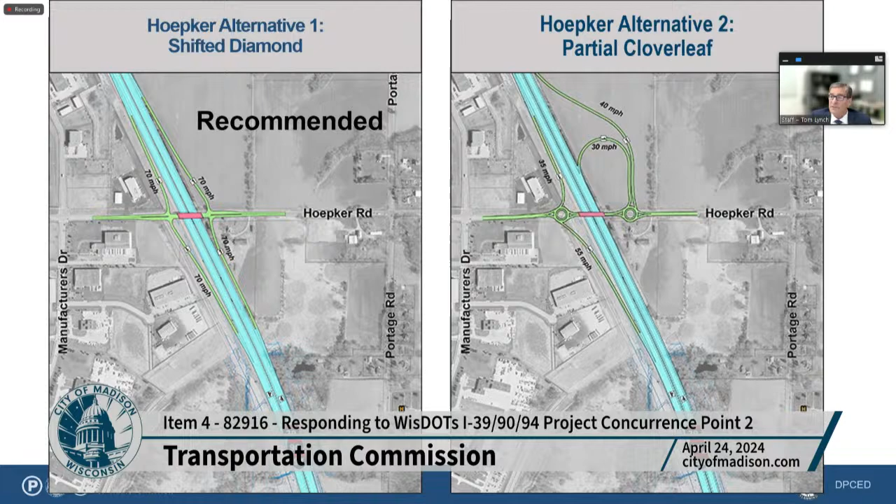As far as the benefits, this improves interstate access to area employers and regional medical facilities. It serves the planned residential growth northeast of the interchange, potentially facilitates further development on sites within the American Center. The American Center was initially kind of developed as a suburban business office park, but recently many, if not most, of the property owners there have decided to densify it and make it a little bit more of a traditional employment area with more streets and taller buildings and less rolling grass, and this would help facilitate that.

It does increase traffic on Hoepker Road and may need improvements to accommodate increased traffic. They have done traffic modeling, and the traffic impacts to Portage Road are somewhat limited. West of the interstate, the development potential brought on from this interchange is somewhat limited due to airport height restrictions. Adopted city plans do not currently consider a Hoepker interchange, but they could be revised.

I just also want to provide a note that I think Brian Grady is here too. Brian, maybe you could turn your camera on so that if there's questions, or if I don't fully explain the land use component to a good satisfaction, feel free to jump in. Okay.

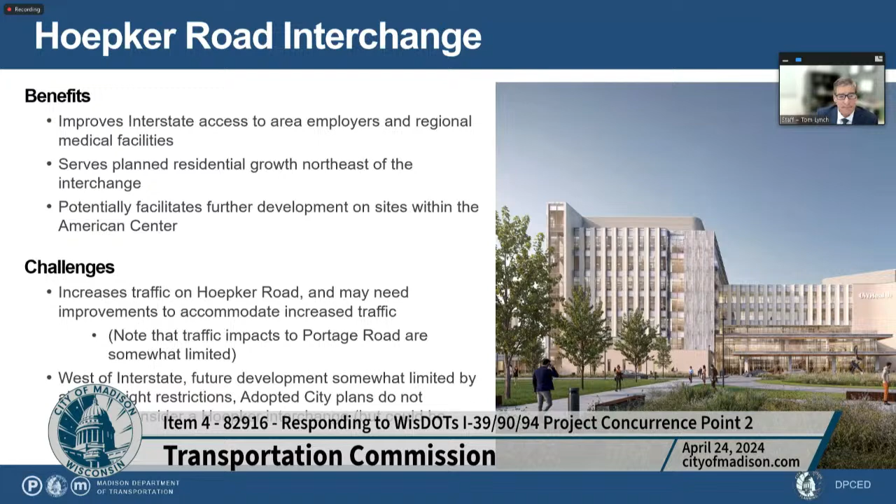This is perhaps the Hoepker interchange impact or benefit area. I think there is some desire that if this was installed and the American Center benefits, that perhaps the American Center could help participate in the local cost share associated with it.

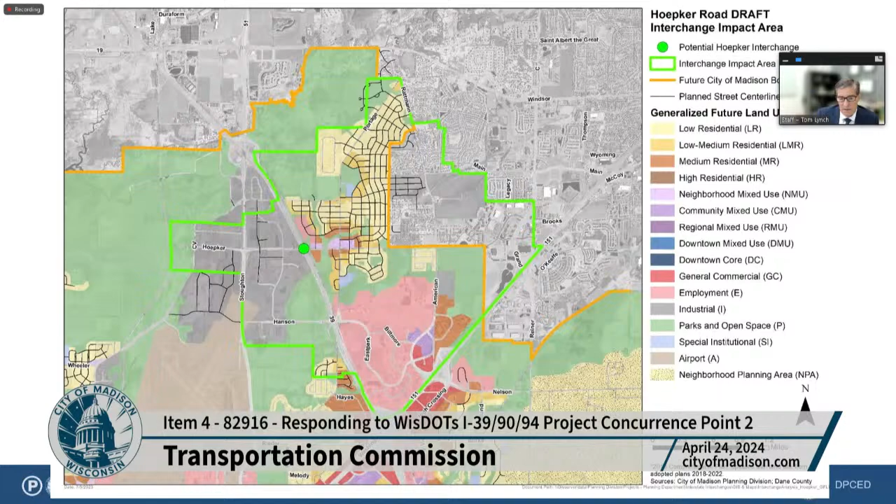These are the types of existing development that this interchange would serve, so it's pretty dense. My wife was a patient at that hospital a couple of years ago, and I was surprised at the size and the breadth of area that the hospital serves.

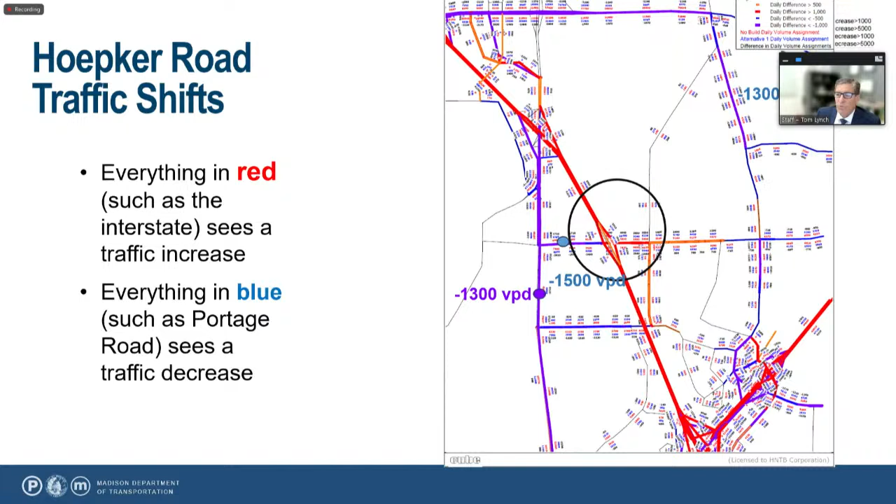These are the traffic changes that would shift. We could get down to the detail, but in reality, roads you see in blue are seeing a reduction in traffic, and roads you see in red are receiving an increase in traffic.

With this interchange, there'd be more traffic on 39, 90, 94. But Highway 51 and some of the local roads you see in blue would see a reduction in traffic. I'll note that this portion of Portage Road, from Hoepker Road down to Hanson Road, would see a decrease in traffic, yet there's almost no traffic change in Portage Road south of Hanson Road.

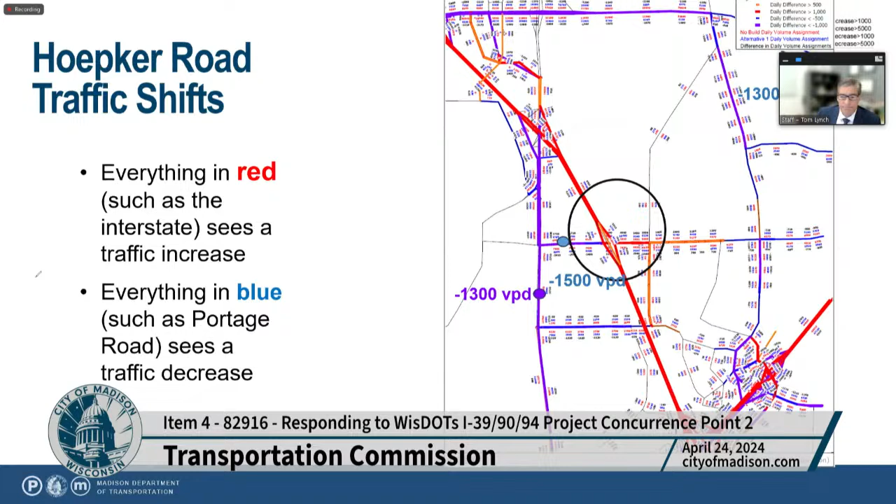These are assignments we recently received from WisDOT's consultants. You can see that Hoepker Road, west of I-39/90, there's a reduction of about 1,500 cars. East, there's an addition of about 8,000 or 9,000 cars.

Portage Road north of the Hoepker interchange, 700. Portage Road south of the Hoepker interchange, 2,600. These are quite modest, not significant traffic changes. I'm also using an old slide, so the statement here that it's no longer the preferred alternative is wrong - alternative 1 is the preferred alternative, and it does include the Hoepker interchange, so please ignore that statement below. I'll correct it in the slideshow.

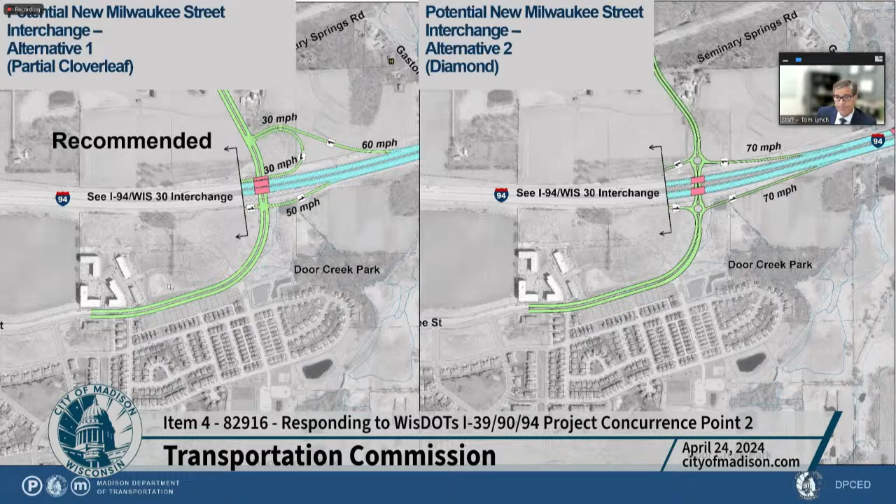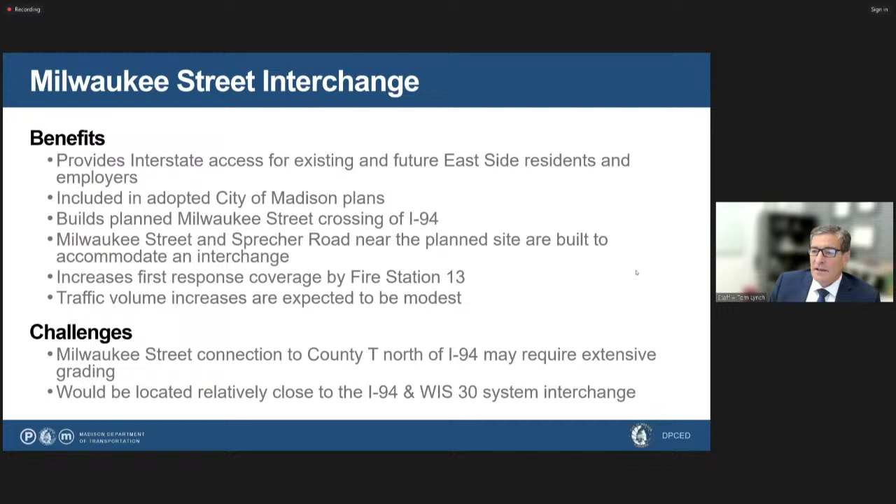I'm going to, if Brian you're here - these are slides I think you state with more passion than I do. Brian, do you want to give these slides right now? I'm not sure I see Brian. Is Brian on? He's not on, so I'll try to state these with the same passion some of our planning staff would. Tom, did you need Ariana to send him an invitation? No, I've sent him an invitation. Oh okay, yeah, so that's fine.

The benefits: it provides interstate access for existing and future East Side residents and employers. It's included in the adopted City of Madison plans. It builds the planned Milwaukee Street crossing of I-94, which has been planned for so long the bridges are already there. The Milwaukee Street and Sprecher Road streets near the planned site are built to accommodate an interchange. The Madison Fire Department is interested because it increases first response coverage by Fire Station 13. Traffic volume increases are expected to be modest. The Milwaukee Street connection to County T north of I-94 may require extensive grading - in some ways that's WisDOT's problem more than ours, since it's their project.

It would be located relatively close to the I-94 and Highway 30 system interchange. Again, WisDOT is willing to allow that to occur.

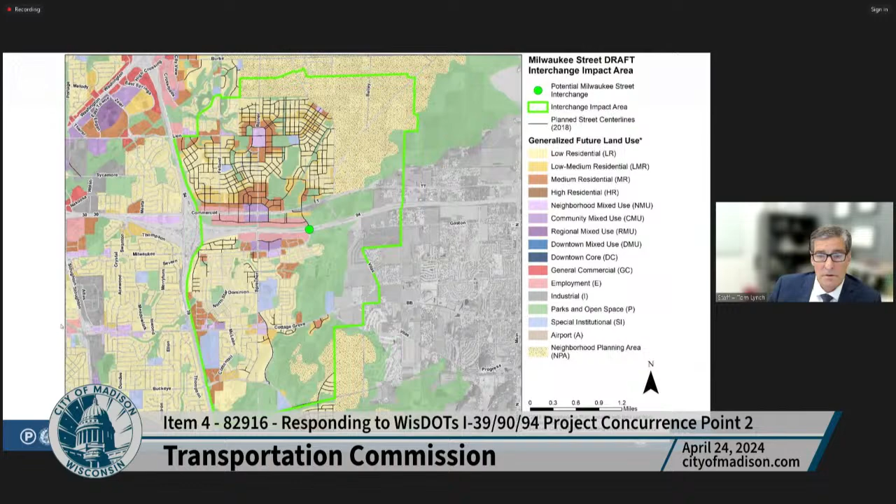There we go. The interchange is shown in the neighborhood development plan from 1998, last amended in 2012. So actually it's been in our plan for 25 years now. It's in our comp plan.

The interchange study recommended by Common Council in 2017 said that the city supports the concept of an interchange at I-94, subject to additional study to determine the impacts of the project on the city, the environment, and planned city growth areas. An interchange would help implement land use and transportation recommendations in the Northeast Neighborhoods Development Plan and the Sprecher Neighborhood Development Plan.

This is the vision that was shown, I think, in the Sprecher plan. City planning says that basically this area could support the density shown in the pictures to the right—one is over by Arbor Gate, one is by City Center West. One might also look at Cottage Grove Road—

not Cottage Grove Road, but if you go to Cottage Grove at the highway interchange, you notice there's a fair amount of employment density developing there, and Madison can't really compete with that. I think there's a feeling that we would be as attractive for employers if we had interstate access like Highway N does.

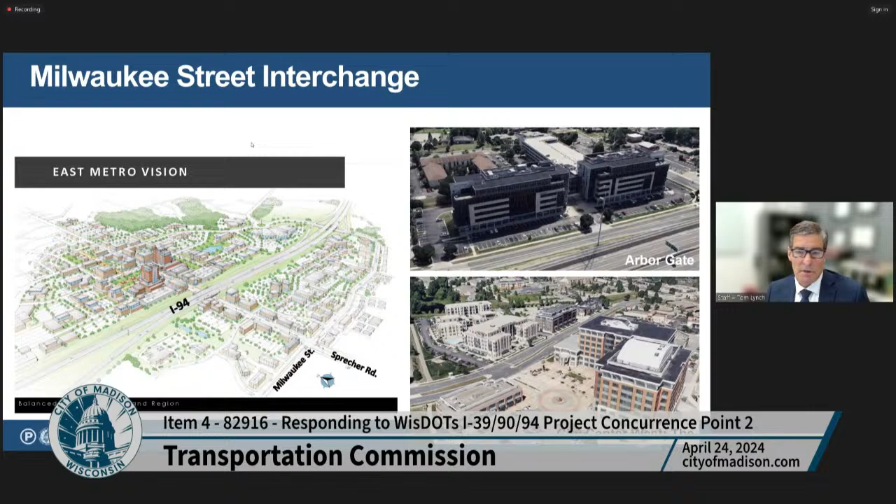So the traffic effects of the interchange are somewhat modest.

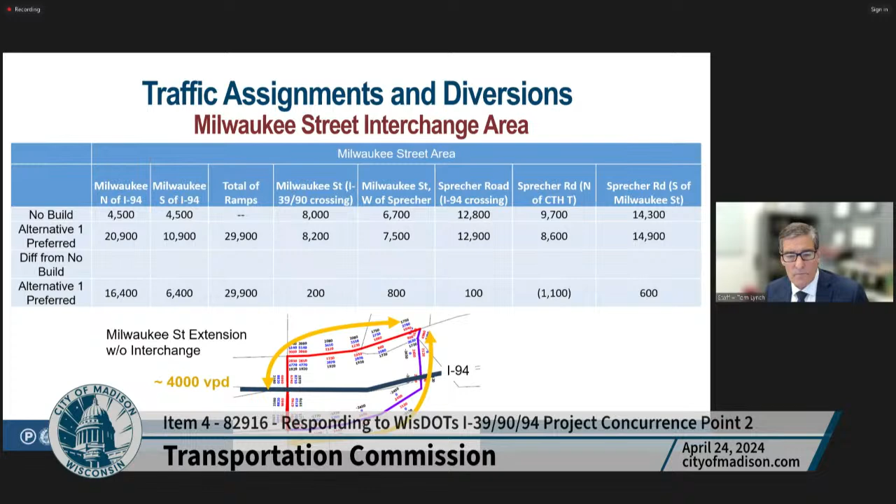First, I want to address the extension of Milwaukee Street to County T without an interchange. If we look at the bottom here, in the traffic model, extending Milwaukee Street to County T would shift about 4,000 vehicles per day that currently use Sprecher and County T onto Milwaukee Street. So it would shift traffic, but it doesn't really affect Milwaukee Street west of Sprecher, and doesn't really affect Sprecher south of Milwaukee Street.

Right now we have the housing development—I think it's the Meadows, right here, you know that area. It would be fine; it might even be advantageous to introduce a little more traffic there.

Here is the difference in traffic that would occur if an interchange were placed there. This assumes the extension to Milwaukee Street already occurs. You can see all of these traffic volumes on Milwaukee Street—differences of 200 cars a day, 800 cars a day, 100 cars a day.

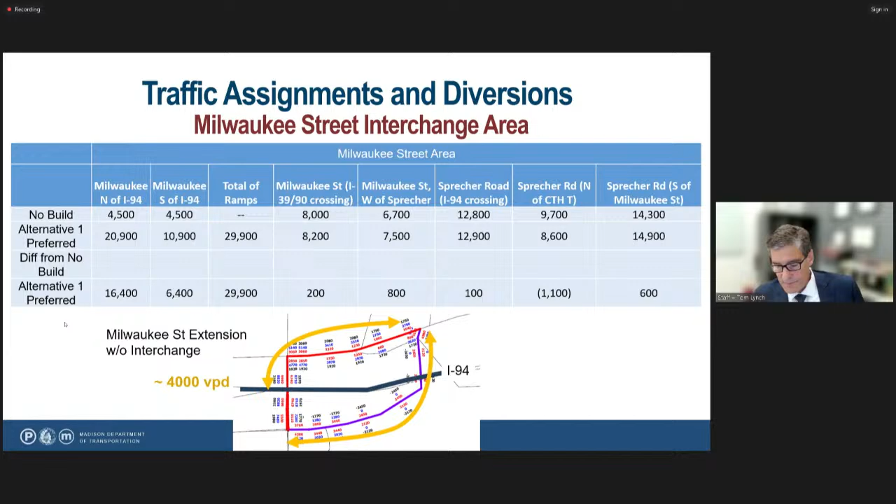Now let's look at the Highway 151 interchange. This is the current interchange—a system interchange. In its day, this was the height of modernity, right? Cloverleafs are less desirable now because of some of the weaving movements that occur between the on-ramp and off-ramp.

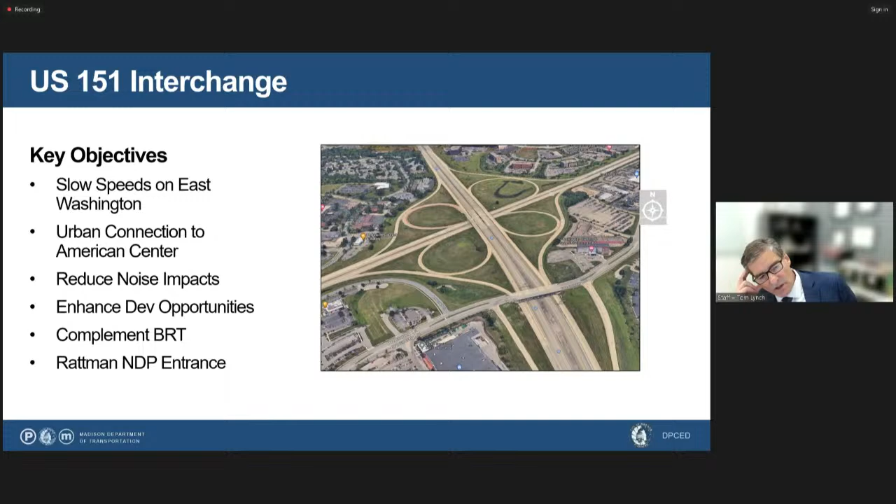For this, some of the city's key objectives would be to slow speeds on East Washington, provide an urban connection to the American Center, reduce noise impacts, enhance development opportunities, and complement BRT—and perhaps change the entrance to the American Center to be more like what's in the Rattman neighborhood development plan.

I think this just helps provide a little bit of context of what's there. You can see that this is East Towne, right? And this is Home Depot.

To our upper left, there's a lot of jobs, right? And it's very difficult to get to those jobs via a bicycle. And it's very difficult to get those jobs if you are a driver that doesn't like to use highways, right? So if we could address some of those deficiencies with this project, we would be for that.

We also would like to slow speeds on East Washington Avenue. In 2021, we had 5 pedestrian and bike deaths on East Washington, which is amazing, right? It's unacceptable. If you look, this is a picture right from Street View, and you can see East Washington in this area has a 55-mile-an-hour speed limit. If you are a pedestrian and you get hit by a car traveling 55 miles an hour, you will die, right? So we would rather see an interchange that supports a lower speed East Washington Avenue.

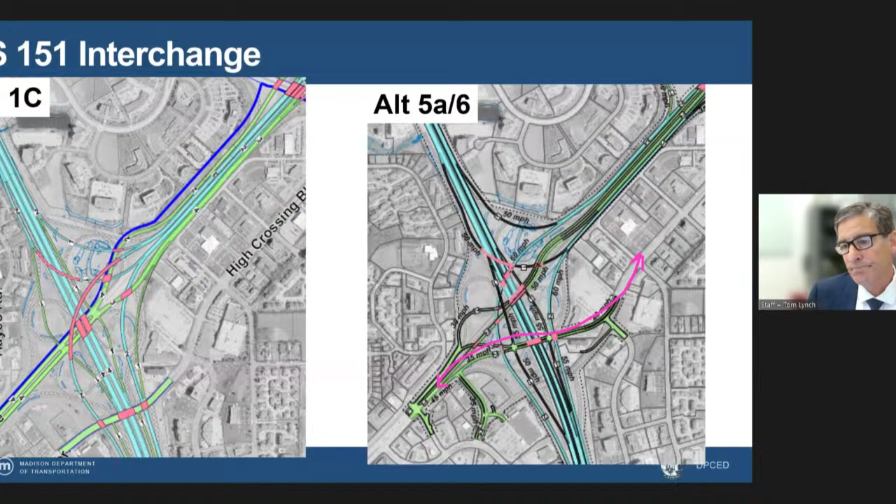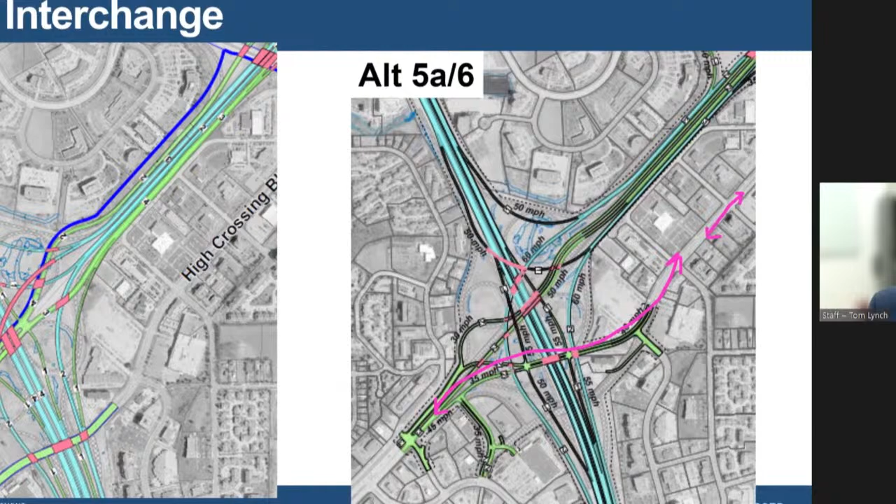We had hoped that perhaps we could route East Washington onto High Crossing, right? And then all of a sudden we have an urban entrance into our city, right, that doesn't go through this. That experienced some problems. The City of Sun Prairie wasn't necessarily in favor of that. And it diverted quite a bit of traffic to Highway 30 and created problems.

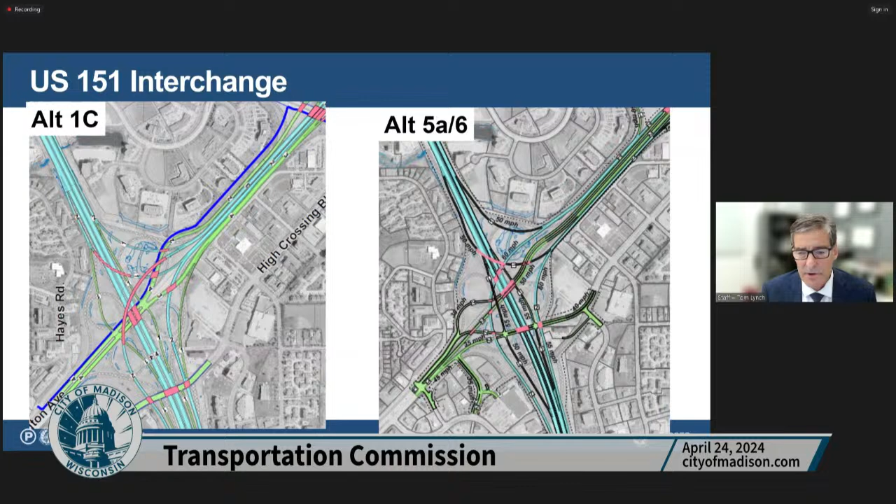It was kind of like a whack-a-mole problem. About 30% of the traffic that was going to be on East Washington went to Highway 30, and then they felt like they had to do improvements to Highway 30. They kind of modified alternative 5A and 6 to the point where we feel like it's not the best alternative anymore. There's too many free-flowing ramps, and it doesn't really slow speeds.

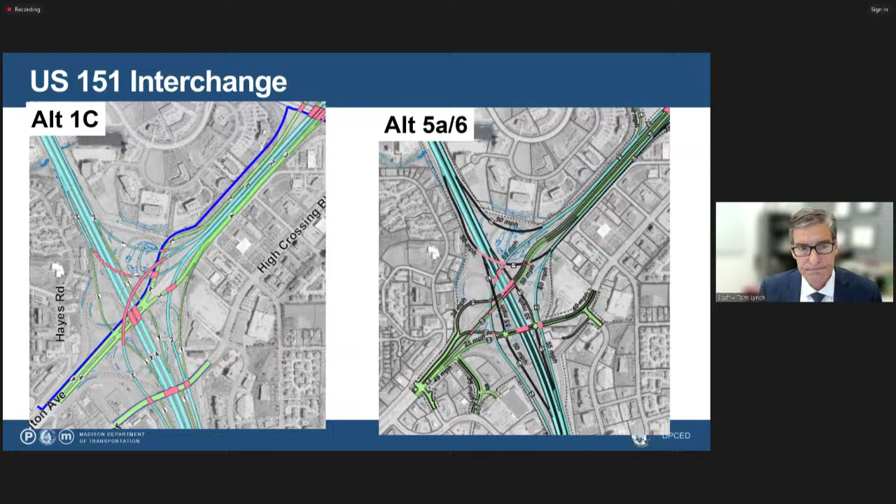So now city staff support alternative 1C. I think I have a slide where I'll go through the components of 1C a little bit better. Let me go down. Yeah, this is it.

We no longer support this. You can see it has, there's no signals to slow traffic. The free flow ramps have no logical bike connections. For instance, these types of situations are poor.

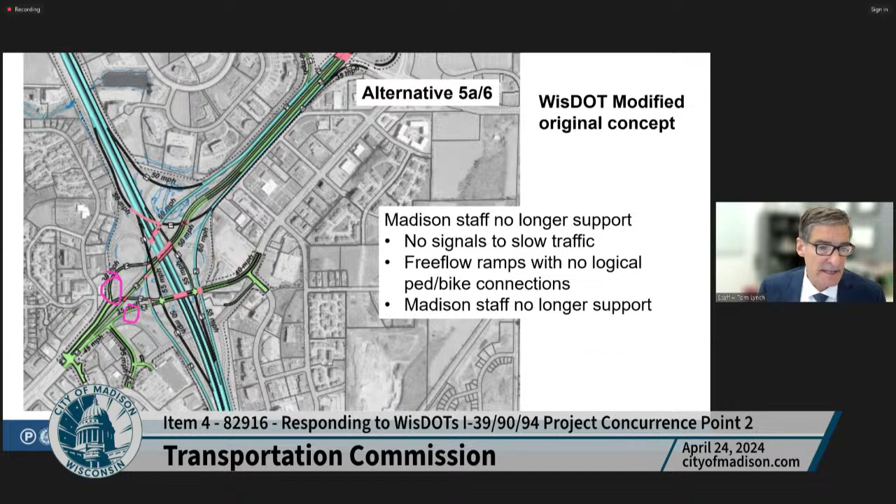So with that being said, they have recommended this. We prefer this to anything they've done. While it is a directional interchange, there are some good things that we like about it. Notice that traffic that comes in from Sun Prairie and/or gets off the interstate to come into Madison has to go through 2 signal-controlled intersections. So instead of having free flowing ramps that promote speeds of 40 miles an hour or higher, cars will have to go through signals, which will logically make them travel at a slower pace.

As far as bike accommodations, we would like a better connection for bikes to not only the American Center, but also to that path that is on the southeast side of Highway 151 between Madison and Sun Prairie. So what they've done is they've created an off-street bike and pedestrian path, shown in blue. Whereas now there's no way, if you're at East Towne Mall, you can take a bike and really get to the American Center, unless I guess High Crossing might be something, but here there will actually be a path that goes through the interchange and takes you right to the American Center. And then if you go through this interchange right here, it'll connect with the existing path that goes to Sun Prairie.

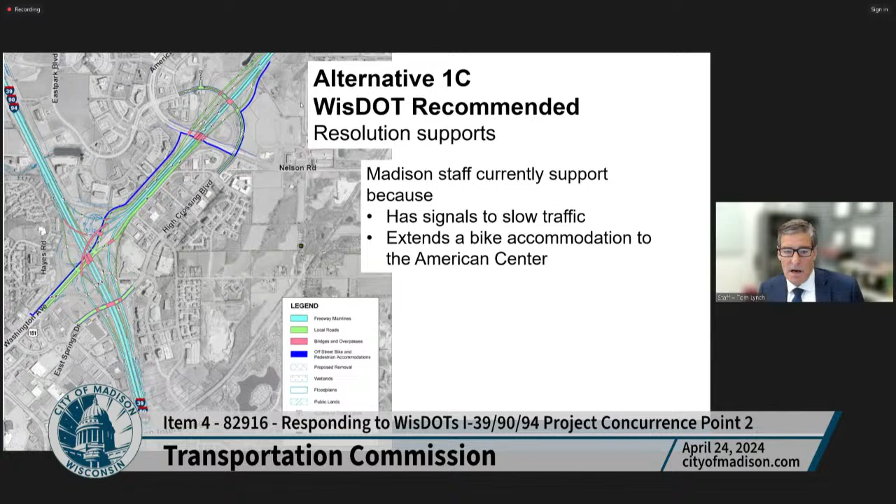As far as the Highway 30 interchange, I think they want to reconfigure it so that there are fewer left exits. The things that you see that are hatched, gray and hatched, that's the existing interchange, and what you see in blue is the new interchange. The new interchange meets their standards, and it essentially fits inside of the footprint that they have now. So I guess we don't have strong opinions regarding this. It's an expensive interchange, but this is their budget, not so much our budget, right?

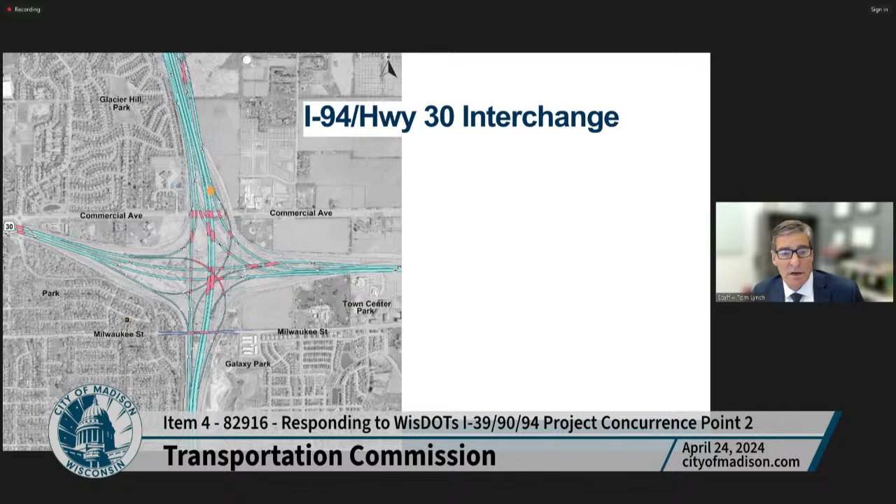Things that we have made an opinion on—again, this is their project, but you can see the modernization of the existing travel lanes, and this is a little bit of a misnomer in that in the section of I-94 between the Badger interchange and 151, there's actually another lane right here. So basically the existing situation is an 8-lane freeway.

We knew that they would want to expand it, so we were advocating for a managed lane that could be treated like the Beltline flex lane. That would be a capacity expansion when they needed it. They have said that they need CD roads, collector distributor roads. So basically what that would do is expand it from 8 lanes to 12 lanes.

Their actual full-on recommendation is they'd like to expand it and put in the CD roads, 12 lanes. In the resolution, we've said that we don't concur with the capacity expansion and that we discourage the use of CD roads. So I guess we have to recognize that this is not our road, but this part of the preferred alternative, we're saying we're not on board with.

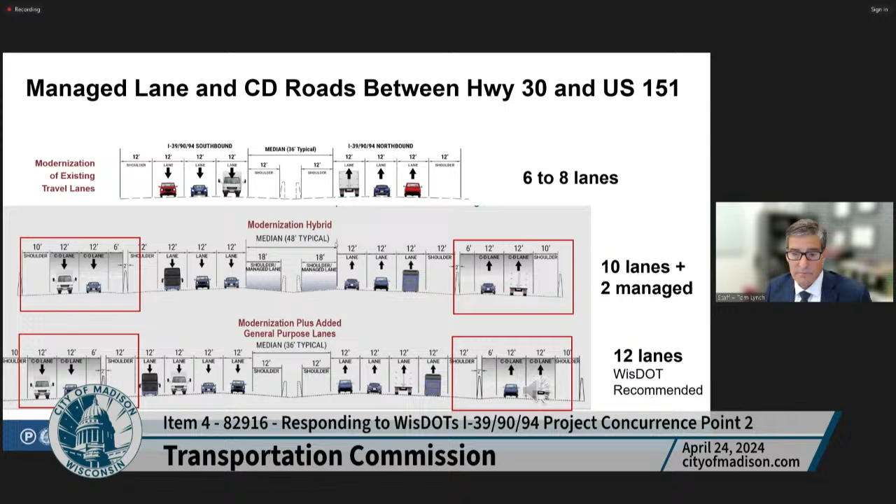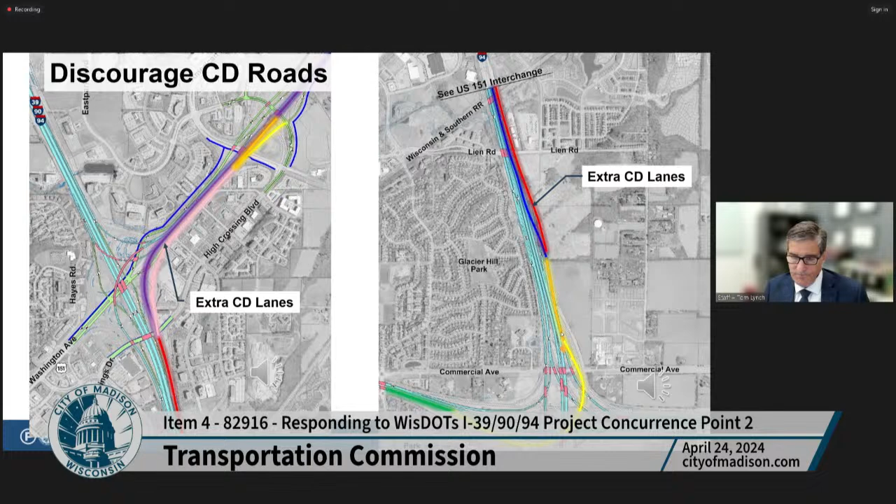This is an example of where the collector distributor roads would be. In the northbound section, you can see how they have a CD road here. What's in purple would be a CD road that goes to Sun Prairie. What's in pink would be a CD road that goes to the American Center. It peels off the main line here in the red. If we look to the right at the Badger interchange, the entrance from Highway 30 goes to a CD road that's in blue. If you want to go on I-94 to the north, you take the blue. But if you want to go to Sun Prairie to the east, you take the red.

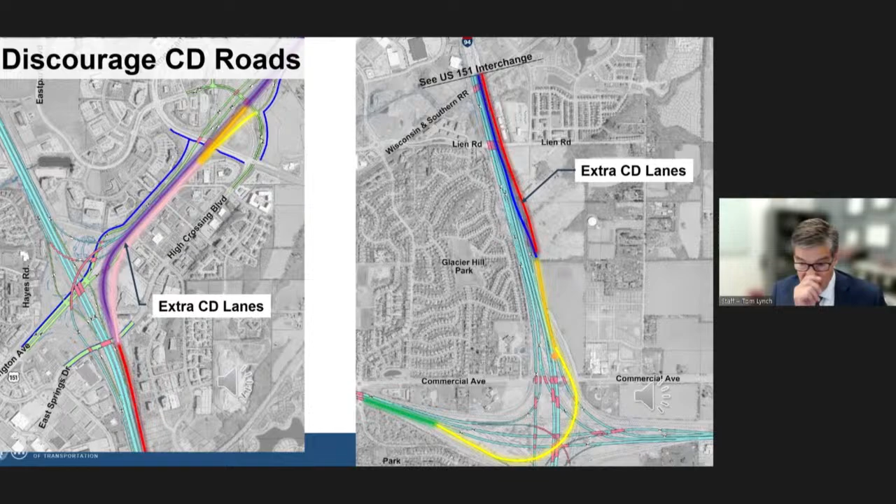Wisconsin DOT and their traffic modeling will say that these are necessary. I'm just going to acknowledge that if you drive this, there are backups. The Highway 30 to 151 connection - if you go in the morning, there are backups and traffic is going quite slowly. But it does add pavement capacity.

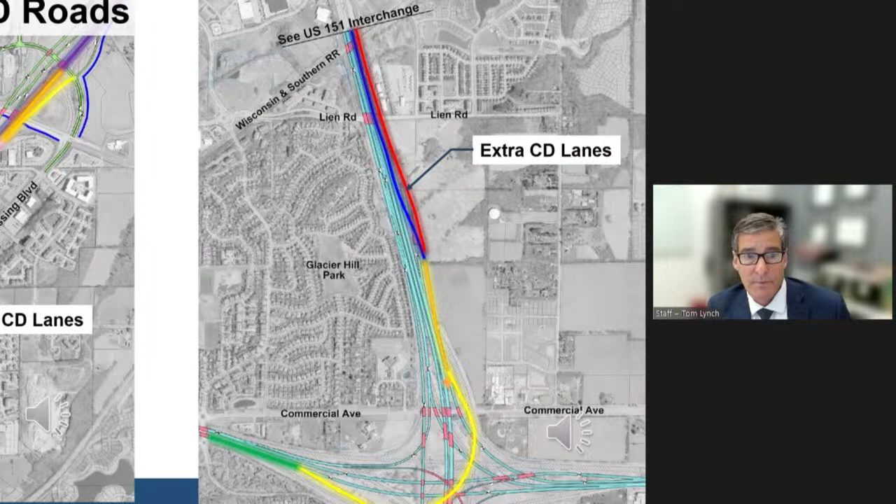This is an example of some of what the CD roads have. Again, the resolution says that we discourage this, but this is right between the Badger interchange and 151. Here you can see this is a basket weave right on the east side, and then on the west side there's just a traditional CD road.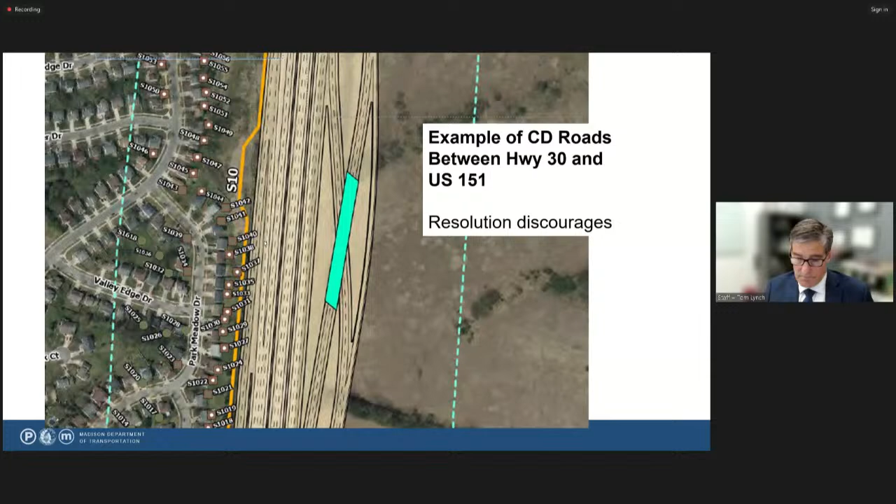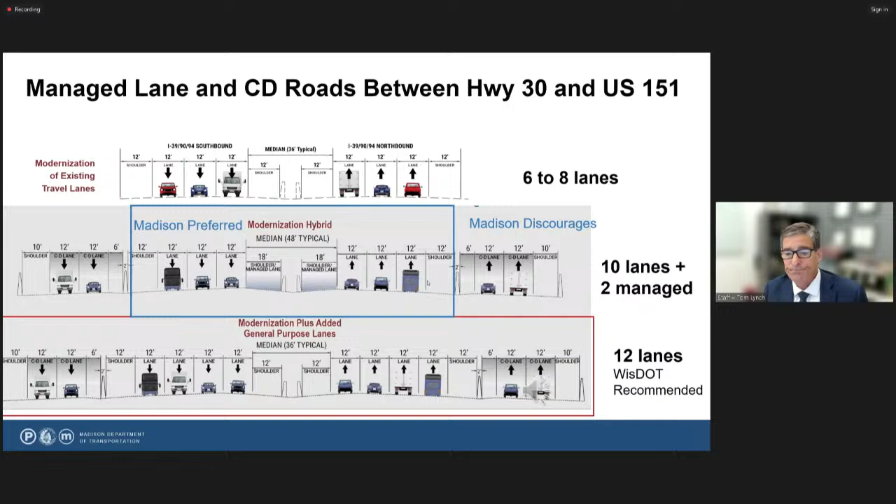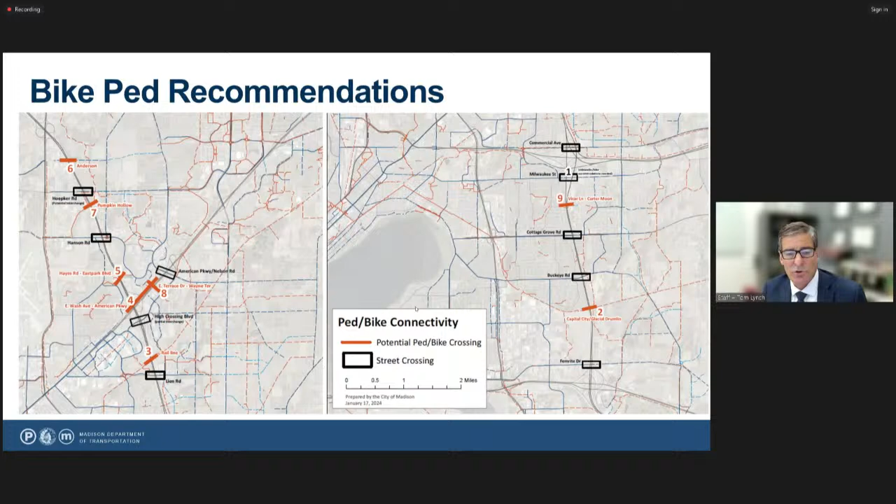So what we have here in blue is what the resolution says that we prefer. In the resolution, we also state that we acknowledge all of these bike connections that we asked for in a previous resolution. That was about 2 months ago. And then I think we emphasized Milwaukee Street.

Milwaukee Street continues to be a challenge, right? It's a little scary to think that they may not get to this area until 2040. Because this is not a great solution for 15 years, right?

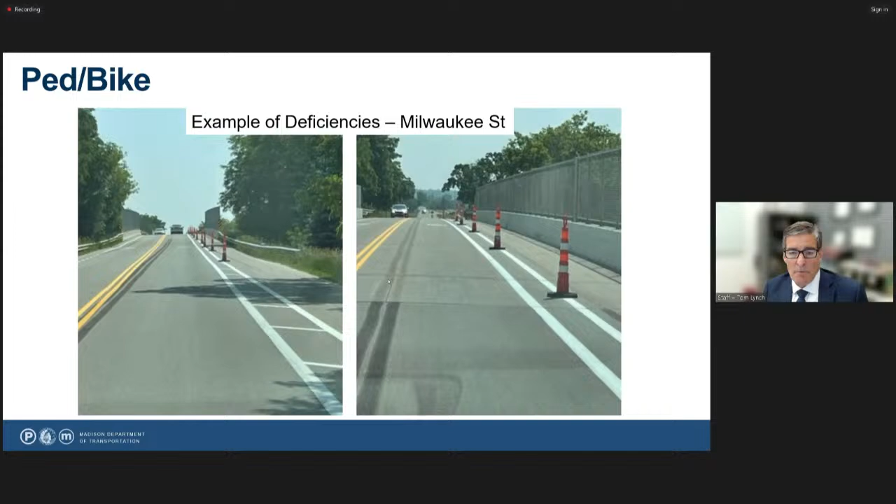As I mentioned, we don't agree with Wisconsin DOT on everything, and our values are different. But I'm just going to compliment them on the noise modeling that they did. I used to do this in my previous job, and they did a very extensive job. They shared with us last week the preliminary analysis and what they felt like where noise walls were reasonable and feasible. I've shared this with some of the alders that are directly affected.

I think WisDOT is willing to build many noise walls. Traditionally, this has been a difficult thing to get WisDOT to do due to their criteria, but due to maybe some of their innovative modeling, a new modeling program, some changes in policy, I'm going to say the noise component of this project, they've addressed it. They've done a good job addressing that. Right now the results are preliminary, so I don't think I can post them, but I have briefed alders who are affected, and if you would like a briefing, I can do that.

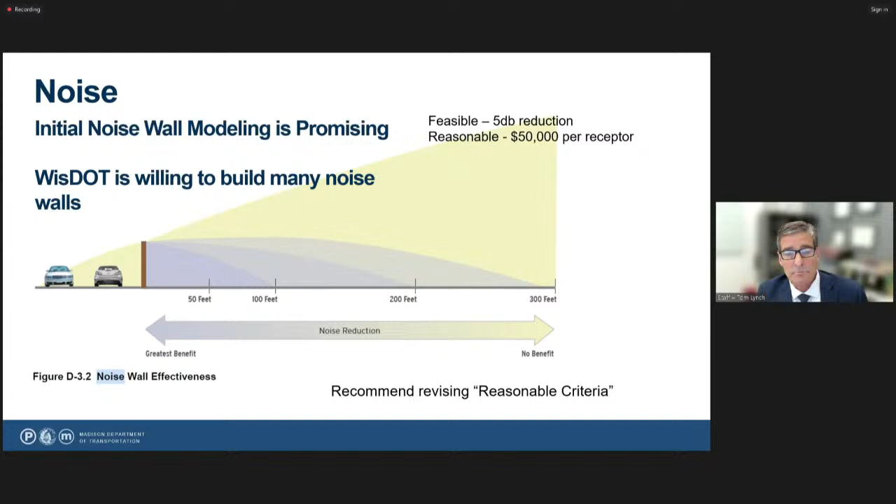The cost share policy, we've put this in as a thing in the resolution. It's one of the very last 'therefores.' First, I want to clarify that this is a capital cost, not an operating cost. I think some people are saying, well, if we have a budget deficit, why are we talking about this? This is a capital cost, much like University Avenue or Atwood Avenue. So it doesn't affect our operating budget.

They only redo the freeway once every 60 years. So if we want an interchange or a crossing, now is the time to do it. If we don't do it now, then we'll wait 60 years, right? And that might be fine. But I'm just going to say that if our land use plan says the Milwaukee Street interchange is needed for the uses we're trying to encourage, then we have to participate in that, or our opportunities for the future won't be there.

Right now, the WisDOT cost share policy is 50% for new interchanges and crossings, and that includes some of the bike ped crossings. What we would like is to pay 50% minus federal participation. Using the current Wisconsin DOT cost share policy, a $20 million interchange times 50% would mean we'd have a $10 million local cost.

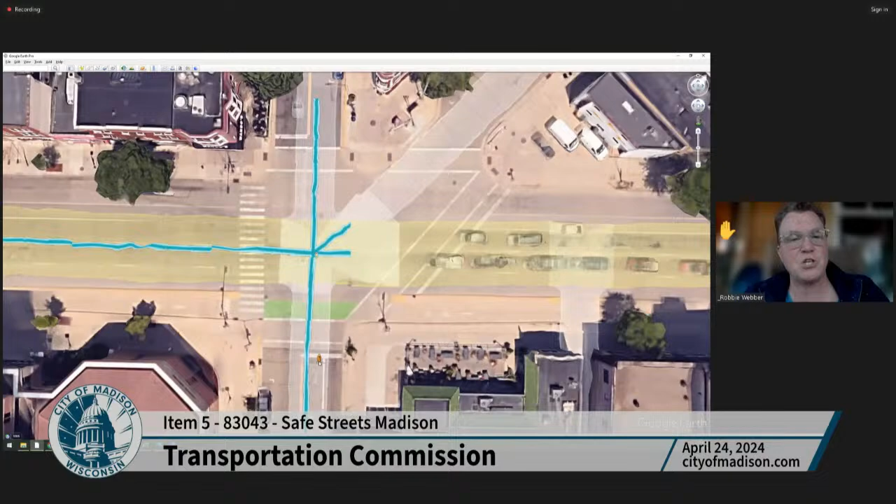No, I realize that, but you said that when Kohl Center traffic lets out, there's a lot of pedestrian traffic crossing to the ramps. Yep. And you also have a lot of northbound drivers trying to make a left turn, and they can't make the left turn because there's not enough space, and they almost hit the pedestrians because they're impatient. So my question was, what exactly were you proposing that would improve either of those situations?

Yeah, so right now, this is looking north. We'll have a queue of southbound traffic coming out of the parking garage, a queue of northbound traffic leaving the event. It's problems before and after events, and it's really just a problem all the time now because of the parking garage situation, and Frances getting a lot more traffic. So it's just a simple, two-phase signal. Frances gets the green, peds walk, and then University gets the green.

So what's happening right now is that by the time the pedestrians filter through, they basically use the entire signal phase. Once the pedestrians get through enough that there's a little bit of a gap, you've got right turning vehicles trying to get through here, and left turning vehicles coming from the south trying to squeeze through here, and there's pretty much close calls almost every signal phase after Kohl Center events. So it's the drivers fighting pedestrians to try to get through, and the solution would be to add a protected left turn green arrow phase to the signal.

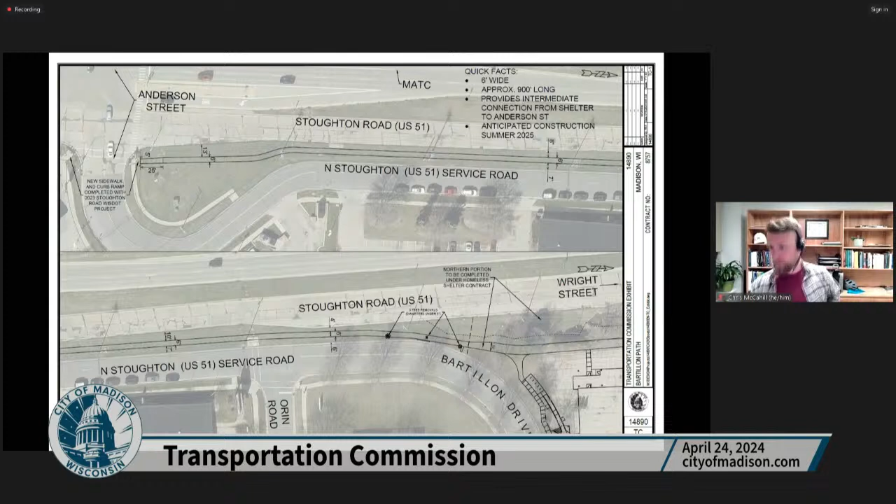Can I just ask you, Kristen, didn't you say earlier you didn't think that people would cross? We were worried that if we stopped it at Orin Road, people would just continue to walk in the grass where Emma's drawn it anyway, rather than cross the road and use the sidewalk. Some people certainly would, but I think a lot of people might not.

Okay, alright, thanks Chris. Bill, go ahead. I think it is worth continuing some sort of path down to Anderson, but I guess I was thinking the same way as Harold. I would make it out of concrete on the part that's going to definitely stay after WisDOT does their project, but I think asphalt would be sufficient and cheaper for the 4, 5, 6 years before Stoughton Road gets built. So I think you can make a crossing at Orin, but the path is worth the expense down to Anderson.

Thanks, okay, sure, thanks Bill. It sounds like the majority of folks are saying we need the path, even though a portion of it might be temporary, but perhaps we can do some cost saving measures on the temporary portion, and maybe that will help. Bill, did you have something else? No?

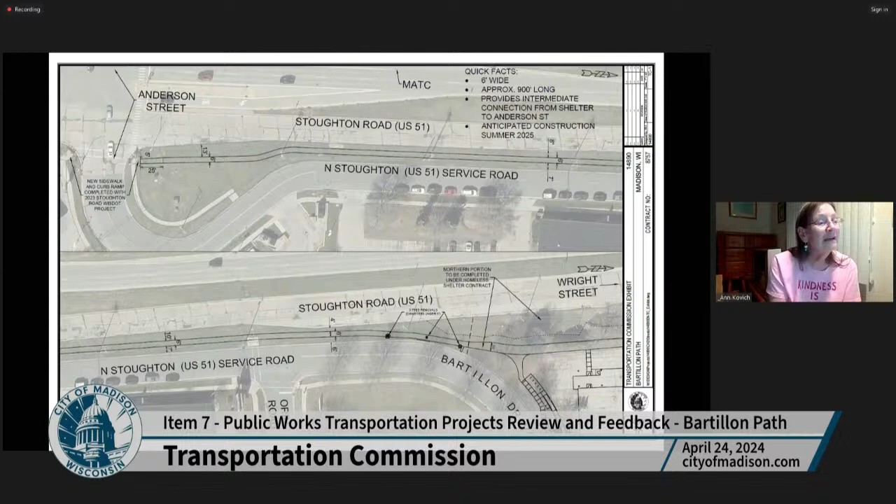Okay, next we move on to item 8, which is updates from members of other boards, committees, and commissions. Do we have any reports? Robbie?

Yes, this meeting hasn't happened yet, it's happening tomorrow, but on the agenda for the Joint Campus Area Committee is a relatively significant transportation item, improving the Lakeshore Path at the UW past Limnology. According to the UW, 15,000 people a day use that path, pedestrians and bicyclists, and right now they're separated—pedestrians to the north on the lakeside, bicyclists between the Limnology building and Bascom Hill on the south side. It's a pretty tight squeeze. There's parking there, there's a blind curve, and you have to go through a parking lot when headed east. They have a proposal to improve all of that on the agenda, so we'll get a presentation on that. Even though it's on the UW campus, it's a pretty significant connection for a lot of people, so I thought people might be interested to know about that.